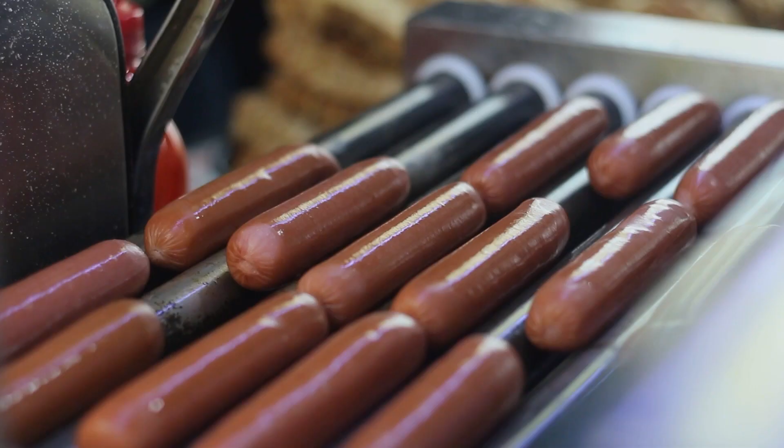As globalization continues and the culinary cultures of different countries collide, food production is moving towards a faster and more standardized model, with food machinery playing an increasingly important role.

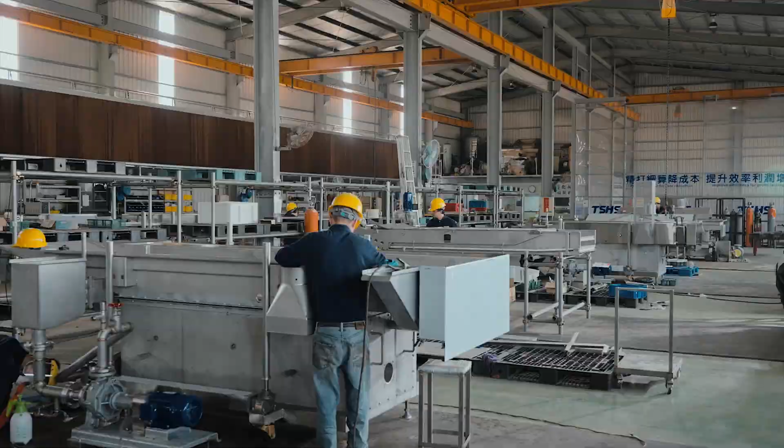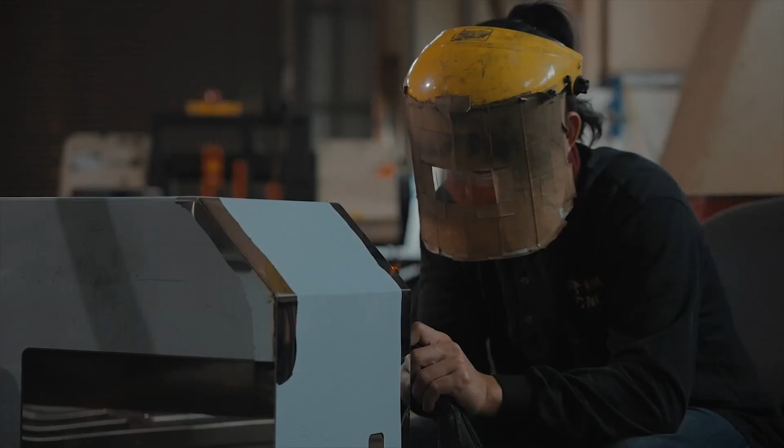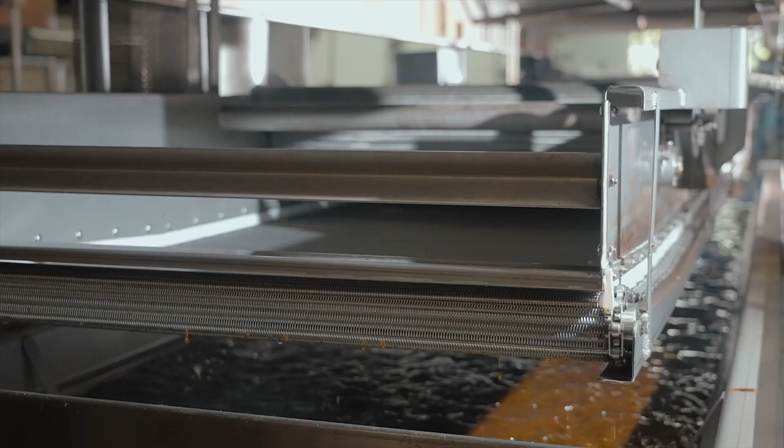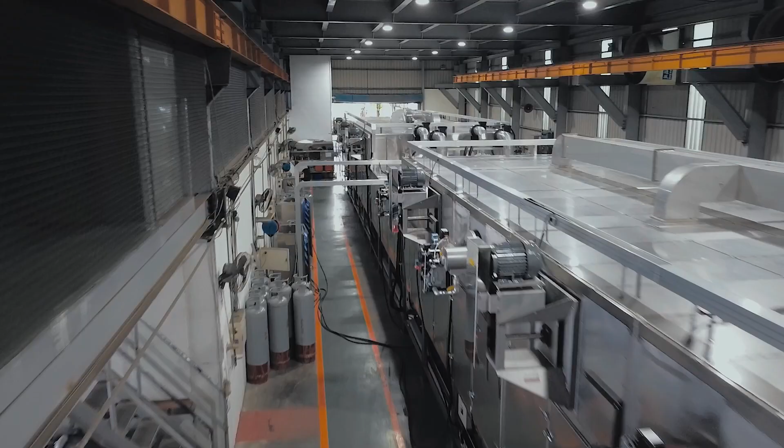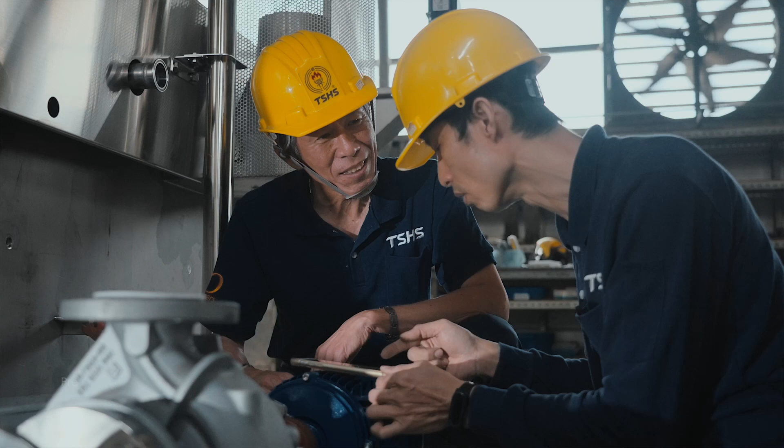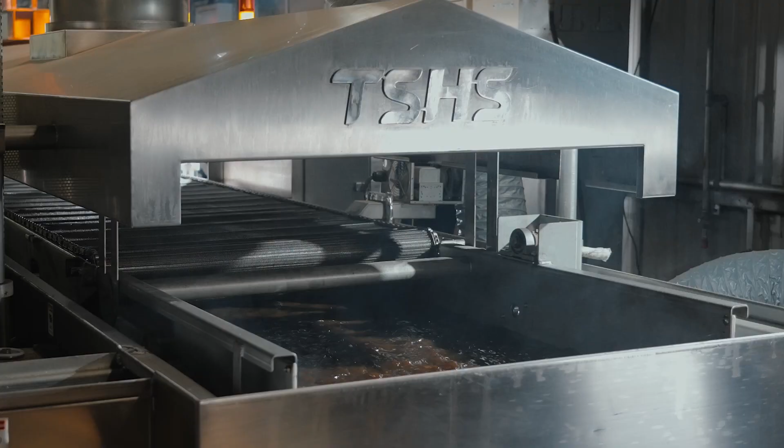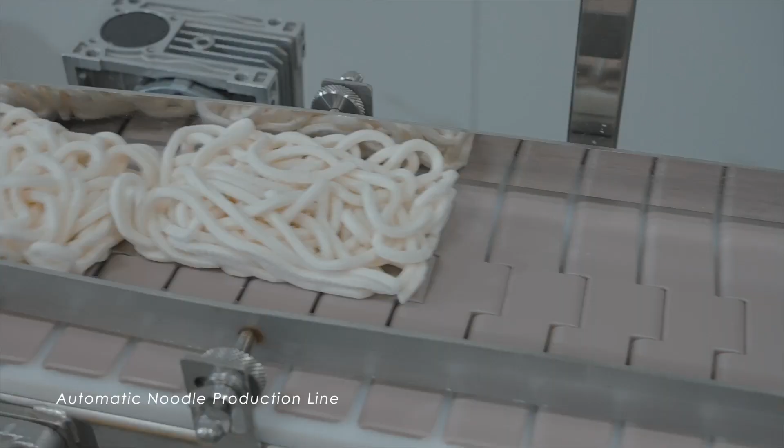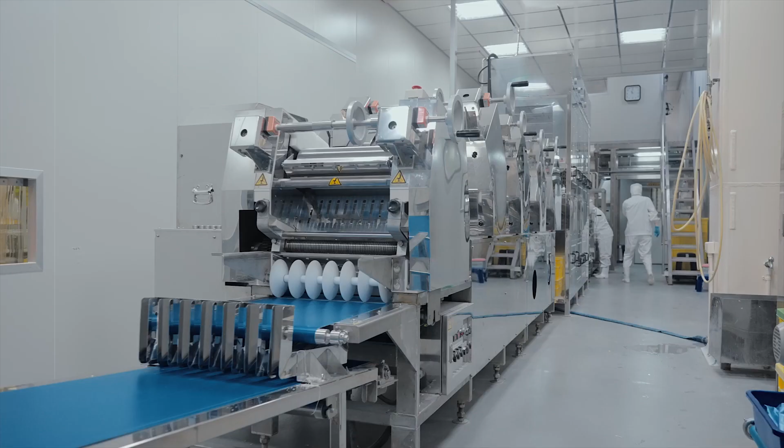Our reliable equipment manufacturing and factory integration is all about customization and adaptability. In the context of the climate crisis and unequal food distribution, we help multinational food makers address production challenges with intelligent production lines, supporting customers as they turn crops into high value-added products and contributing to the stable development of local food supply. Taiwanese companies have strong, flexible R&D capabilities and customization capabilities to grasp market trends and continuously improve the efficiency and quality of products.

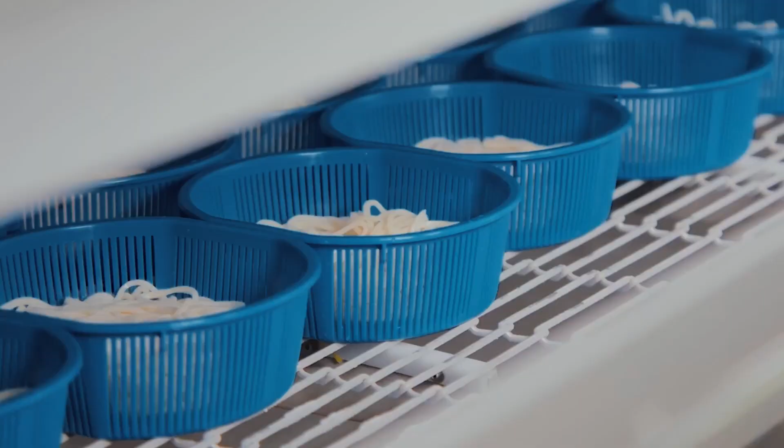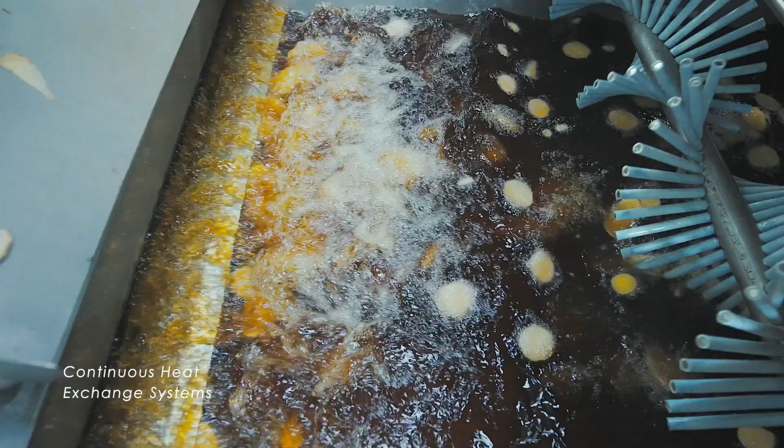Noodle dough is fermented by aging, making it more elastic, while cooked noodles can be flash frozen to -20 degrees Celsius, enabling it to be stored for up to a year. Continuous heat exchange systems have also made frying 70% more heat efficient and reduced oil consumption by 20%.

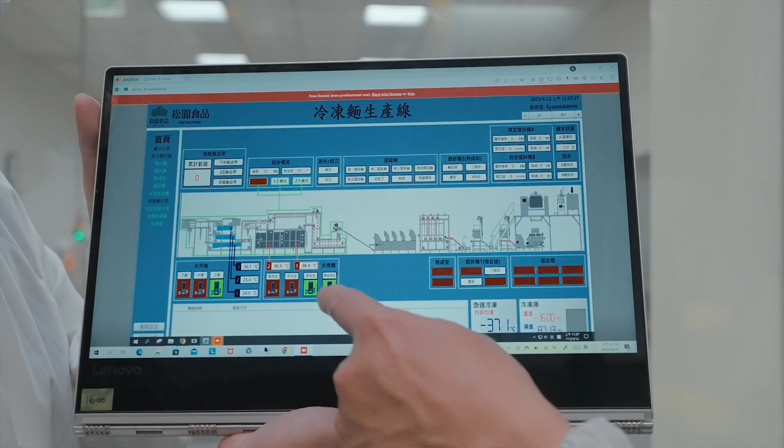IoT and Industry 4.0 technology has massively improved food safety. We can analyze data from a variety of systems to implement smart production, failure prediction and intelligent scheduling, as well as intelligently tracking products, resulting in huge gains in both efficiency and quality.

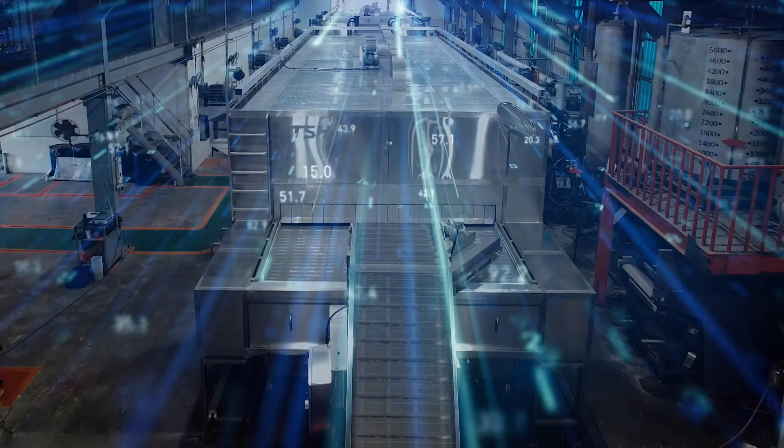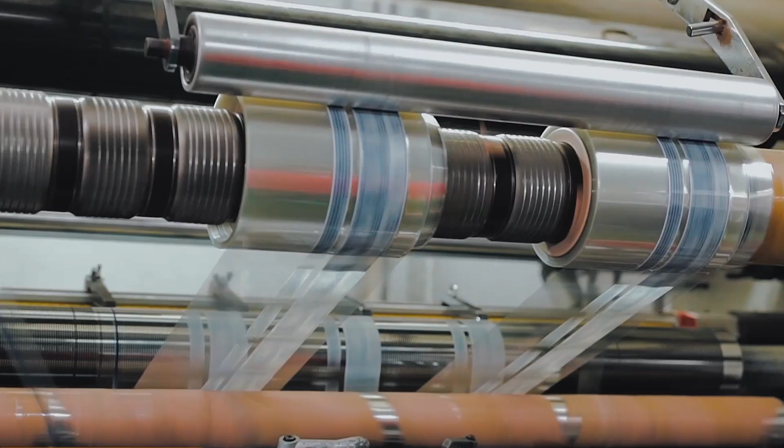In the context of wider trends in food processing and packaging integration, Taiwanese companies are adopting flexible designs that make the most of innovative and practical materials that enable them to rapidly adapt to the needs of a diverse range of product lines, while always taking food safety and branding issues into account.

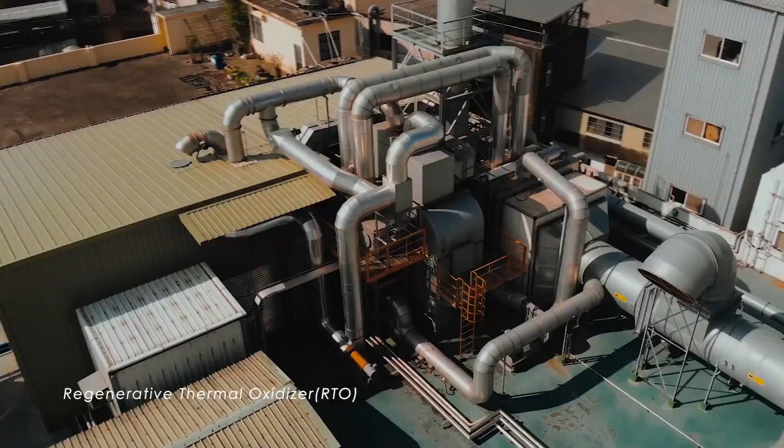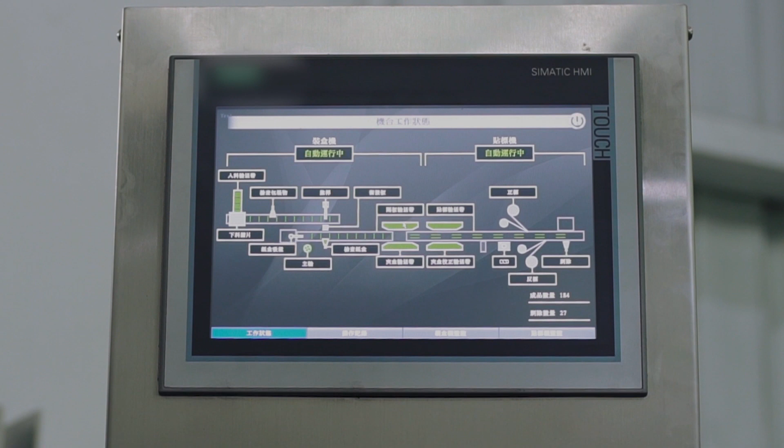The global push for net zero has created new challenges for food machinery in the form of carbon tax. Smart tech can make production processes more transparent. Taiwan is at the forefront of all these emissions reduction efforts, from greener packaging and manufacturing waste recycling to improving energy efficiency.

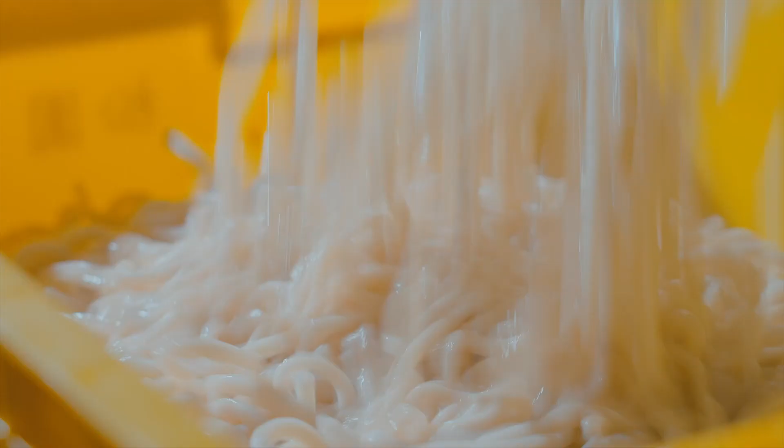Innovation, saving energy, integration, improving flavors. New solutions for food machinery. Taiwan, your intelligent partner.